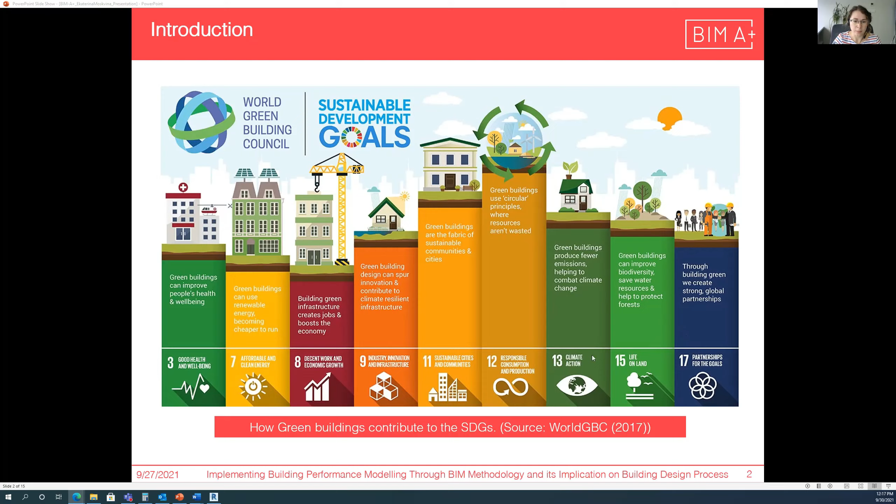In other words, the performance-based approach is goal-oriented, as opposed to the conventional method of design. The work consisted of three parts: a literature review, a survey, and a practical case study.

Throughout the literature review, the main issues of implementing performance-based design at the early stage of design were identified: an absence of a clear and straightforward system of performance objectives, an absence of reliable methodology or strategy for performance analysis at the beginning of design, and an absence of simple methodology for multi-criteria assessment.

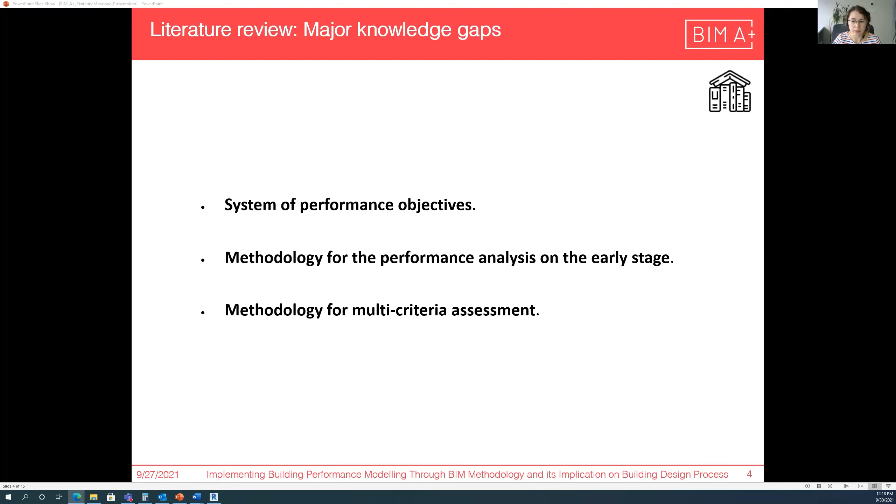The literature review was also the basis for the second part of my study, an online survey among 43 design companies from 20 countries. The main goal of this survey was to understand the current picture of awareness and acceptance of the performance-based approach in practice.

The survey consists of two parts: demographical information, with main data about the company size, type, and experience, and a second part with 10 statements where respondents should agree or disagree with each statement on a scale of 1 to 5.

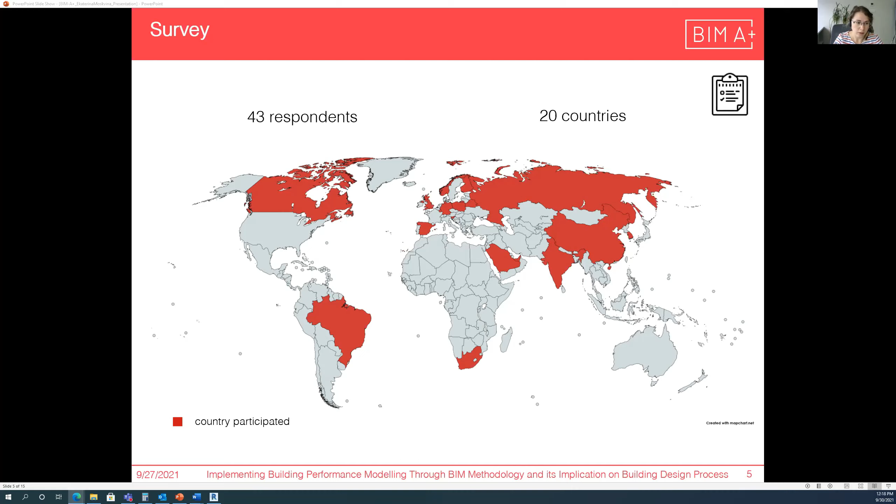The survey results show that although many research works were done on this topic, almost 20% of practitioners are still not familiar with the concept of performance-based design. Only half of the respondents use the performance-based approach, despite the fact that 86% of them use BIM.

The reasons why they don't use it ranged from not knowing what the approach is, to it being too complex, taking too much time, or simply that the client didn't ask about it.

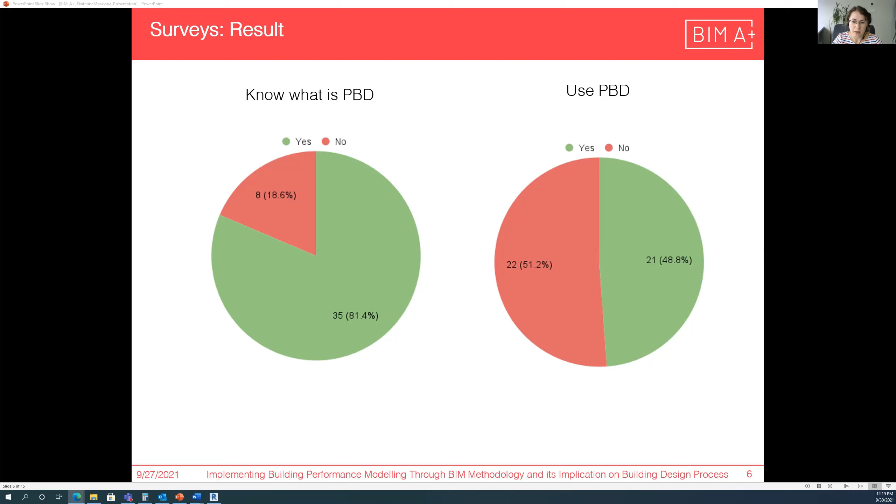The results of the second part of the survey show the attitude of professionals toward the benefits and disadvantages of the performance-based approach in the early design stage. We can see that in general, architects and engineers who use this approach are aware of the benefits it brings to the early design stage, although not all statements were rated unambiguously.

The last part of the study was the practical experimental application of performance-based design on a hypothetical project of an office building in Menges, Slovenia.

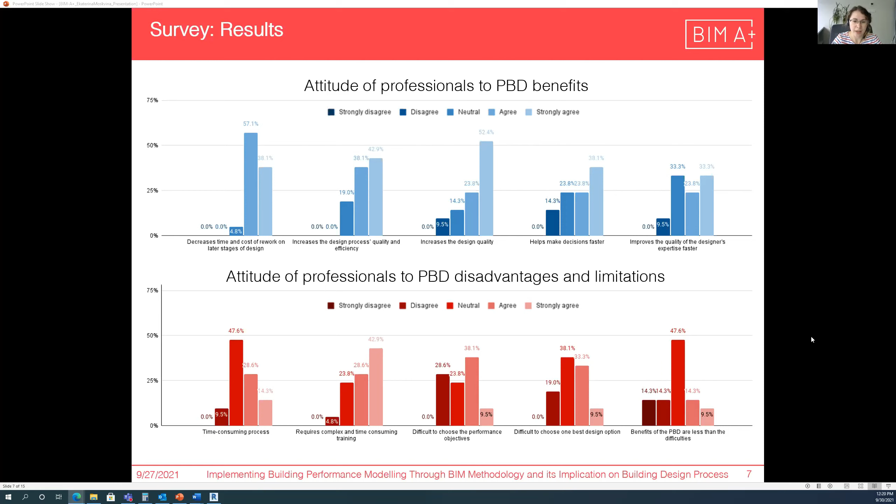It was intended to identify issues with the application of a performance-based approach in BIM from the designer's point of view and compare this approach to the traditional one. For both methods, the same tools were used: Autodesk Revit for modeling, and the Cove Tool platform for analysis and optimization.

Firstly, for both methods, we set the requirements: type of the building, its location, its total area, starting window-to-wall ratio, and site.

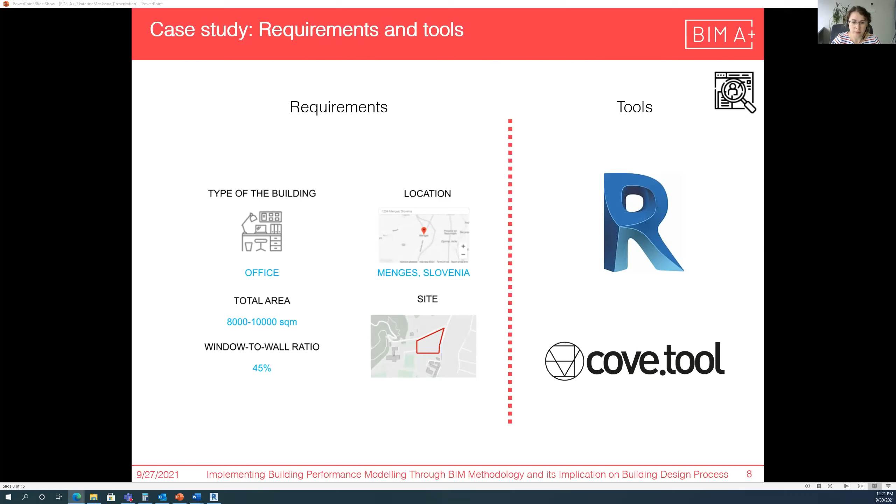The conventional approach test was done first to exclude the influence of knowledge gained during the performance-based design. You can now see the two workflows, and you can see the difference between the conventional approach and the performance-based design approach.

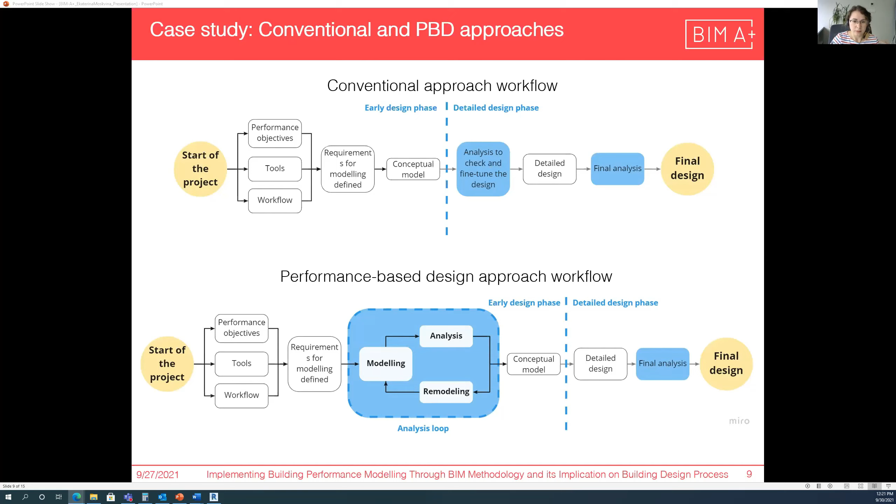Let's go to the results. For the traditional approach, the results of the conventional design were the model of a two-story building with a total area of 9,600 square meters, with simple layouts and analysis results presented on the slide.

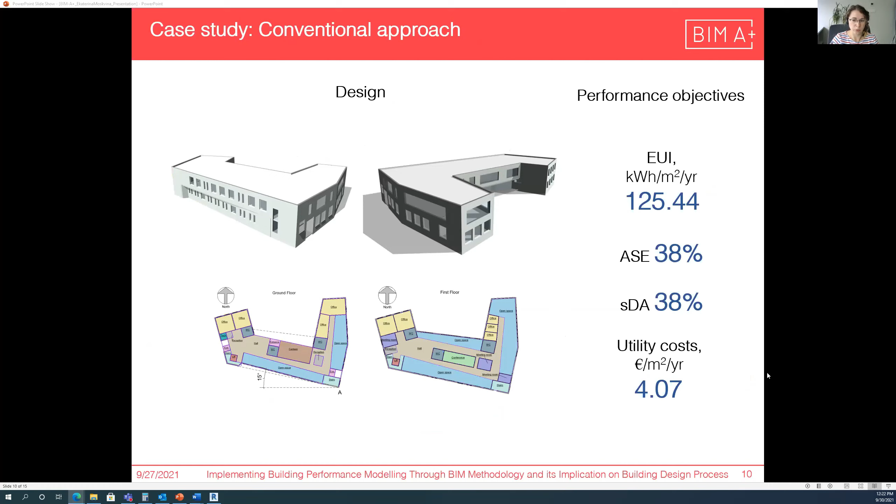For the performance analysis during the performance-based approach, more than one model was created because it implies more than one analysis cycle. Overall, there were four analysis cycles: shape, orientation, glazing ratio, and glazing distribution as design options were analyzed, and the best option was selected for each design parameter. Why did we select these parameters?

Because these are the most difficult to change at the later stage of design. Each of them has a particular design goal, such as lowest energy consumption, lowest utility cost, or highest SDA.

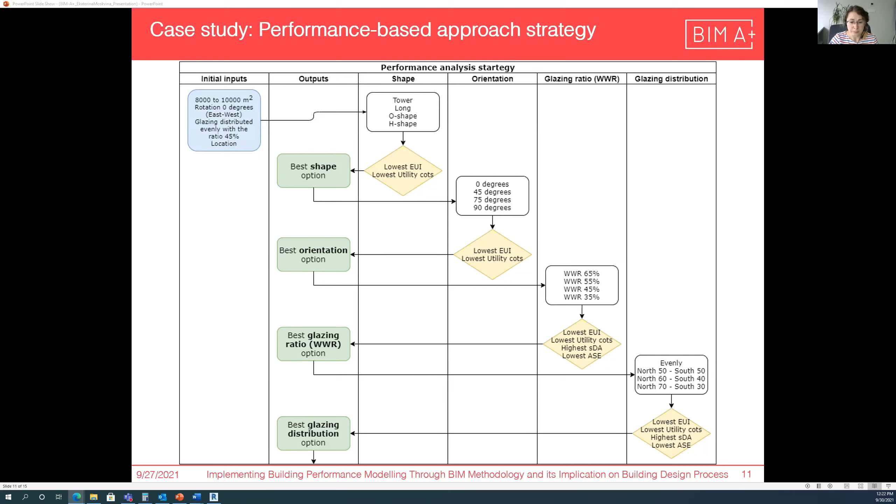Using this strategy, we obtained the following results. For shape, the long shape showed the best result in terms of performance. Orientation was from east to west. Glazing ratio was 35%, and glazing distribution was evenly distributed on two sides, northern and southern.

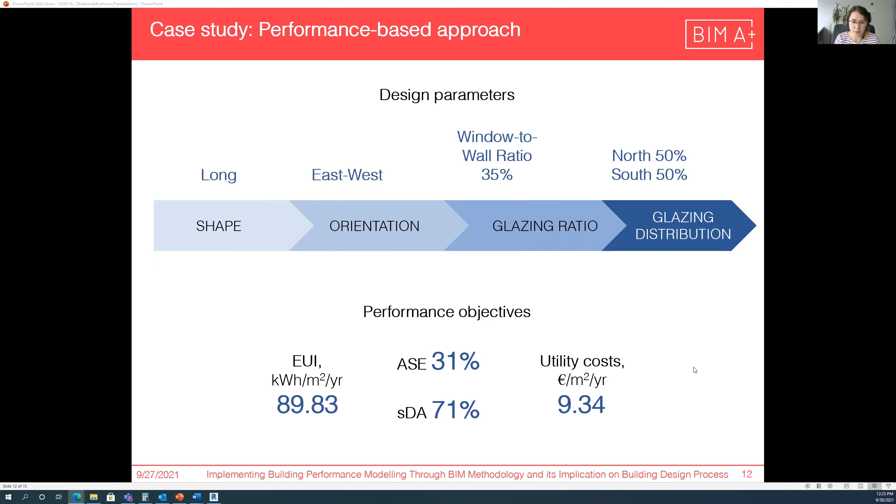Why don't we see the design in this case? Why don't we see the model? Because the result of this approach is not the design itself, but the knowledge of which value of each design parameter will perform in the best possible way. We also know how the performance will change, for example, if you start increasing the height of the building or change its orientation.

When comparing the performance analysis results of the two methods, we can see that the results for energy consumption and daylighting performance are way better for the performance-based approach than for the traditional one. Although both energy use intensities are lower than the baseline, the value of the performance-based design option is much closer to the 2030 target. For spatial daylight autonomy (SDA), the highest value is better, and for annual sunlight exposure (ASE), the lowest is better, and for both, the performance-based design option showed better results.

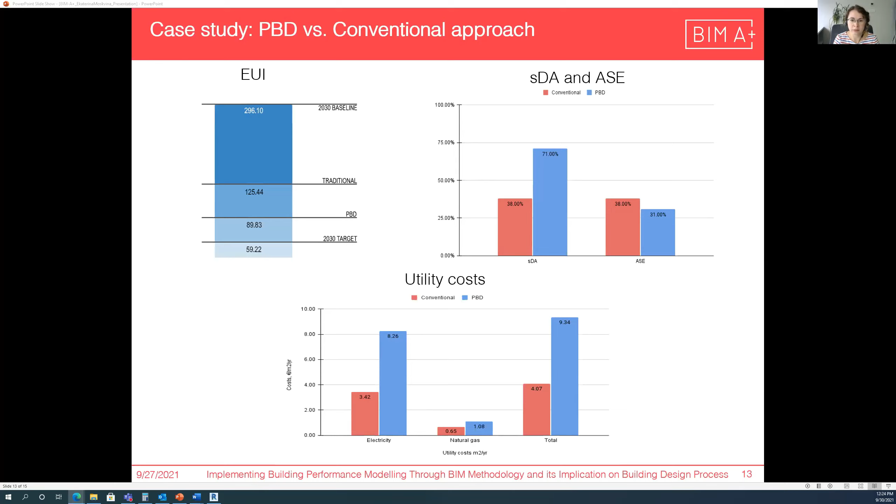In the case of utility cost, it was the opposite, but there could be reasons such as not having high accuracy of the tools, and also different levels of development of the models.

When comparing the results on the basis of time spent, the total time for the conventional approach was 6 hours. For performance-based design, it was 18 hours. But in the overall design process, this difference is not that significant. Moreover, in the case of traditional design, we don't know if this is the optimal solution for this project and how the performance can change — we checked just one option. In case of design modification, a new analysis should be conducted to understand how the changes influence the building performance, and in this case the time difference will be reduced.

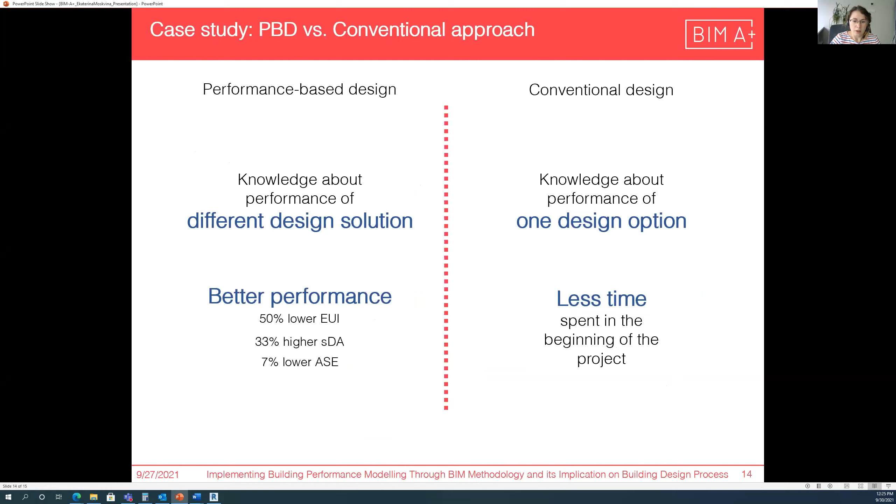So, for the conclusions: all three parts of this work — literature review, survey among practitioners, and practical study — made it possible to research the existing picture of implementation and use of performance-based design in the early design stage in depth. Performance-based design should not be considered as a substitution of the conventional approach, but rather as an additional input of data-driven parameters that should improve the architectural work significantly.

The second conclusion we can make after this work is that the major benefit of the performance-based approach application in the initial stage of design, even before the design, is the ability to explore a wide space of options in terms of future performance and support architects with valuable data when the greatest impact on performance can be achieved with the lowest cost.

Another conclusion made after this work is that even though performance-based design can provide data about future performance, its interpretation and subsequent impact on the building design are solely in the designer's hands. In other words, data is only worth something if it's understood correctly.